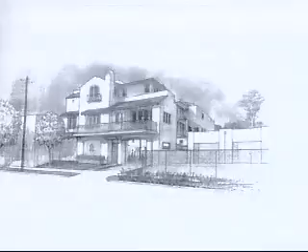The motion stated, item number 1: the mass, bulk, and scale of the project is still aggressive. Study ways to substantially reduce the project, including reducing the plate heights. The roof decks, elevator, and stair tower are exacerbating the overall height of the building. Restudy ways to reduce the overall height.

Number 3, show on the plans the 45-foot maximum height on the sections and elevations. Number 4, verify with building and safety the zero lot line requirements of the building code, which may significantly impact how the windows are addressed. Number 5, the board will continue to look forward to further refinement of the architectural styling and detailing. And one landscape comment: reducing the width of the curb cut to minimize hardscape along Anacapa Street.

Okay, Joe, go ahead. Okay, I'll just kind of jump around. On the height of the building, we lowered practically all the plate heights and the elevator height.

I'm getting the picture there. And I can go to the section. That's probably the best way to do it. This is one of them. Can you also outline what they were before and how much you reduced them by? We were close to 45 feet before.

Actually, I think we're above 45. Yeah, we're right, because we measured from... we didn't measure to the ground. I think that's what it was. You were above 45 before. Yeah, okay. And now that's 40 foot 2 at this end, and we're 40 foot 4 at that end.

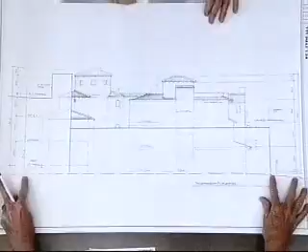All right, and you have a 10-foot plate height on the first floor. This is floor to floor? That's floor to floor, and 10 floor to floor second, and 9 floor to floor third? Right, with an 8-foot elevator tower?

Right. And did you have 2 eights before on these? Eights, and that's 40-foot 2. Right, and what were these numbers before, just so everybody has an idea?

I think they were taller before. I know these were 10, I think this was 9. Yeah, I think the first floor was something like 12 feet. Yeah, it was much taller. It would help to know that. Yeah, we did ask, we kind of thought there'd be an old set of plans.

Yeah, there will be. So move on, Joe, and then we'll have staff look for the old plans. Almost identical on the other, that's the back of the building, 40-foot 4, and that's the tallest portion of the building right there.

And then on the other side, it was the same. They were both the same. And then we go through the sections. You can really see where the numbers are. For instance, right here we had 39.2.

That part right there. I didn't see a 39.2 on your other elevation. At the top, I did. I didn't go to the grade. I think that was later. 10, 10, 9, and 8, then I had a 2, 8.

I think it's this, 40-foot floor to finished floor. Yeah, that's the back unit. 39.2 is the front unit. Oh, this is the only place I could do it, on the front unit, because I could clearly show exactly where that building was and exactly where this building was in relation to the grade.

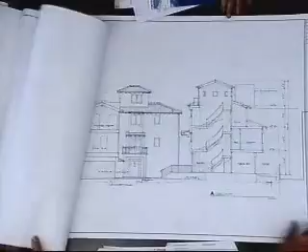The front elevation didn't, it was just a pretty drawing. Okay, let's keep moving. This tells where it is. In other words, it's 5 feet lower than it used to be. It lowered the whole thing 5 feet.

Did you show the maximum 45-foot height limit on your plans? I didn't show it on there, but I thought that would probably be make it all happen. Okay.

Go ahead, what were some of the other comments? One recommendation from the board was about the element in the A building laundry room. There was a suggestion that on the second floor we lose that, so we got rid of it. We connected the two buildings with a connection between this building and this building, a big laundry room and powder room. We took it out and put it on another level, which really opened this area.

This is all open all the way through, so both units are totally separated, with a lot more green space. You can't really tell this from the street, maybe from here, but whoever made the suggestion thought it was really closed up, and we agreed with them, so that's why we got rid of it.

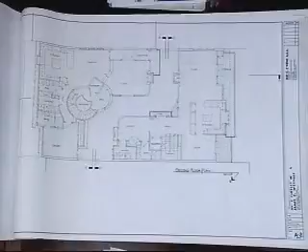Is that it, Joe? That's it. Do you want to, did you make any further refinements aside from lowering the plate height? We're still looking for the old plans, did you make, let's look at that.

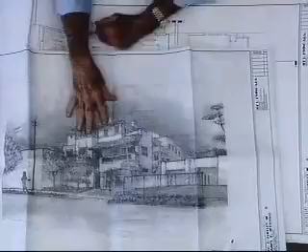Oh, this is really good. You see this right here? Since we lowered the building, we changed the pitch of this roof in the other direction so it looks more Spanish, because this was not very Spanish before. And they didn't like the design of that balcony, so we pushed everything back, especially here. There was a balcony showing on the plan that was too far forward, and we pushed it way back on the roof plan.

All right, let's take a look at the section. It doesn't have your plate to plate dimensions. That's at grade in the back of the building, this is the front of the building. The front elevation would show it. Okay, so this elevation, this is the back of the building here?

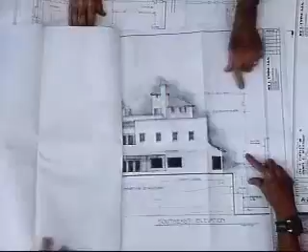You had 39 feet before, plus 7.6, I didn't add them up during this. 47, 46. Then I did the same thing here, so your plate added up. On the lowest level, the floor went from 11 to 10, so reduced by 1 foot on the lowest level.

On the middle level you reduced it by 1 foot, 10 feet here, 10 feet, 11, 9, that's 2 feet, 1 foot 9, and then here, that was a 9 foot.

So your total overall before was what? Did you even have that? Yeah, 40 feet, but that's not to here. Right, so you had, so I took this off.

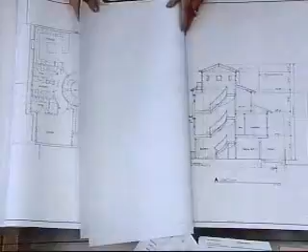This is looking southwest. Okay, where's the southwest elevation on the new plans? Here's the southeast, here's the back, and here's the southwest.

At this end we had 40 foot 2, then we have 40 feet looking southwest, but that's to the finished floor. I'm having a really hard time understanding this. Oh, that's a section. Yeah, this is a section here.

You have 6 more minutes, and then you get to walk away. I'm looking upside down here.

Is it just me? Does everybody else understand that reduction in the plate heights completely? Close enough, that they were somewhat reduced? Okay, let's move on, one or two more over, let's look at the individual elevations and how you have refined the architectural style and detailing.

This would be the southwest elevation. Actually, that's the front of the building. That's the northwest. Here we go, this is the northwest. And this is the old plan, and here's the new plan.

36, 41.6. And that's not even to the highest point, we took the highest point and dropped it down. And that is, without my scale... it's not a very long scale here. This is what you were supposed to do, you just measure from there to there and get it to you. Okay.

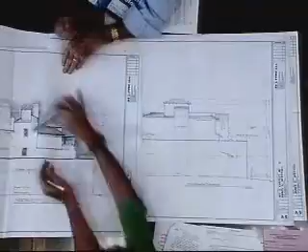It's 4 feet. So, over 36, 41.6, 45.6. And you took about 40, 2 foot, 5 feet, almost 5 feet off. All right, so we can put that away.

Did you verify with the Building and Safety Division the requirements for the zero lot line and how they might impact your windows? Yeah, we did that, and we have 3-hour windows that show us. It's not on this side, it is on the other side. You want to show us? Something in writing from them? No, just show us which windows. Those are it, just a couple on the dining room.

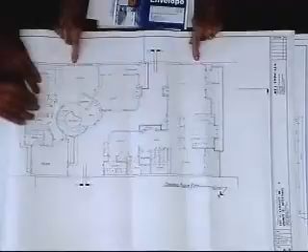Yeah, it's right on there. This is the second level here. Those 3 right there, and those 3 right there. Let's see them on the elevation and see what they look like. 3-hour fixed. Oh yeah, I do a lot of assisted living projects where you have to have that, and this is one of those cases. There's the windows right there. Those 3, and those 3, and that one.

These are set 5 feet back, so you don't have to have a rating. So you verified what the requirements were, and then you just know they have to be 3-hour rated. Okay, ever since 1954.

Did you reduce the curb cut to minimize the hardscape and increase the landscaping? Yes, we did. Do you want to show us? Considerably, still have enough room to get a car out. Oh, these are the old plans. No, it's in the one, those are the new plans. It's just like that, right here. Here's the curb, it was like almost from there to there, and I narrowed it down.

The item on the motion said to minimize hardscape. Yeah, here's the minimizing of the curb cut, that's part of it. Here's the existing sidewalk, we didn't change that. This is hardscape, this is planting, that's planting, and this is all, of course, planting.

So where did you maximize your landscaping opportunities? I had this right here was like this wide, all paved, and then I had an entry much closer. This is a little bit more space than I had here, and I had an entry right here, which increased that. So I considerably added a lot of green space. This is a pretty wide sidewalk, by the way. And they have trees on this green area. We almost talked about putting trees in here, but this is all yucca. Okay, right here. But we did add green space by reducing this driveway.

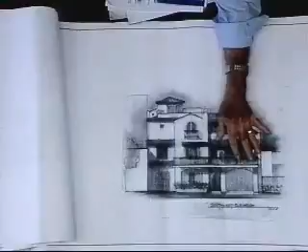So we had a solid handrail in front that went from here to there. We made it open, opened it up so it was all open all the way across. Made the building look a lot lower. And remember, this is a very narrow street, so you'll be looking up at the building all the time. So we had a roof that went like this. Where you see that roof, we made it a gable out of it and put the fireplace, which was already here, and reduced this in height.

In addition to that, this balcony right here is way beyond. It was a lot further, right next to this almost. So we pushed that way back, so you can't see this, can't see that, can't see that roof. You can't see this roof when you're in the street, unless you get on top of the building across the way, which is a warehouse.

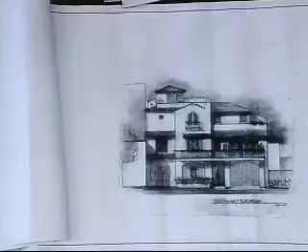Okay, here's the elevations. Where's the existing tree? Here's the building next door to us beyond, brand new. In fact, I think it's still under construction. Do you want to go through all 4 elevations really quickly? Sure, yeah, good.

Here's the building next door. You won't be able to see that part of the building at all beyond that. And then there's a roof deck over here too on that building. And on the back end...

Northwest elevation. Oh yeah, okay. On the back end, here's the building right next door, zero lot line. Building next door, zero lot line. That's the Santa Barbara Winery warehouse, storage warehouse, or one of them.

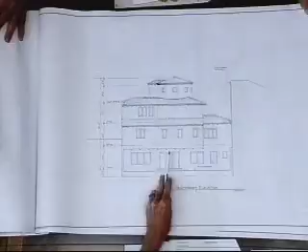Also, I want to add that we're extremely green on this project. There's a new block we're going to be using that's totally green on the exterior walls, which is also a 4-hour rated wall, and we only need 3.

Can you explain? I remember before one of the comments was that the property owner next door was concerned about losing his sun. Here's the wall line, it goes back. Here's the 3 feet right there.

Can you explain how you changed this elevation that would allow more light to come in? It was similar, but everything was taller. I lowered this, we lowered that, pushed that back, pushed this way back a lot more. It was the same face, but we had less of an opening here.

Because this is on the property line. That wall right here is on the property line.

But you pushed that back, you're saying, to have an area where you can see the ocean from here, and you can see the ocean from this building, even from these living room windows.

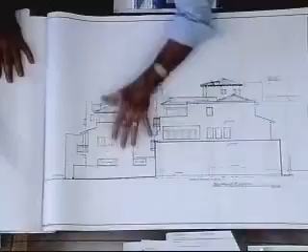And we made this deck smaller here off the master bedroom, trying to open this up so we can get some sunlight. Even doing this for car parking right here, and we opened it up here and here, to get some breeze and more sunlight, facing the south sun.

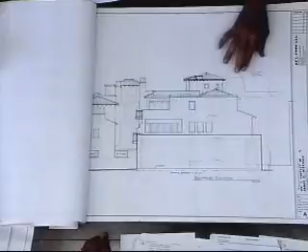This large building next door that has been built - I was out of country and didn't scrutinize that to its full extent, and didn't realize how much impact it did have on me, which is why I'm now concerned about what's going on here. These guys did reduce the height of this greatly, which is a great thing to do.

I have two areas of concern I'd like to ask. One is that there is an area of, is it 1.7 or something, from this property line to my property line? Do you know how big that void is behind the property? No, not really. Do you show your property line as 100 feet or 110 feet, or can you read that number there? 110 or 11. But what's the question?

My question is that there's a void here. I would like to know where this property line is on their property, in terms of how close it will ultimately be to my built structure. My built structure is a 10-foot setback from the property line. There's actually a void, there was a 5-foot something void in there that they have captured some of. I'm questioning what's remaining, and if they will then honor their 10-foot setback from their property line.

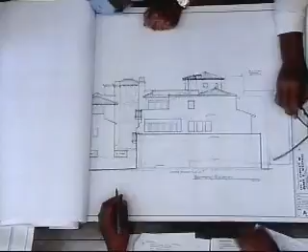May I answer that? Sure. It's 10 feet from here to the property line, it's 10 feet from here to the building - that's the building next door. Okay, that's the warehouse, the Santa Barbara warehouse.

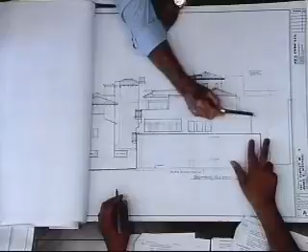You're doing a 3-foot cantilever on the second floor, 7 feet from the property line. We could have gone 4, but we said no, we'll go 3.

In truth, there was a piece of property between these properties that had not been claimed. When your property changed hands, the seller captured 3.5 feet additional property from that no man's land, which left an additional 1.75 feet of property between what is now yours and what is now mine. Did you know that? Let's not worry about that.

We're here about this, so my question is: to what property line are they building? I don't think they have 110 feet of property line. Okay, we'll ask the question and look into that.

Additionally, I'd like to know if it's appropriate to request a sun study to see exactly how this is going to affect my property. Okay, we'll look into that. Anything else? That's it. Okay, great. Thank you. Thanks so much.

Are there any other speakers? If not, we have a letter of opposition from Ms. Paula Westbury. Are there any other staff comments? Okay, one quick question for you folks before we go to the board members.

Do you have a survey of the property? Yes. Is it part of the drawings submitted, or a previous submittal? It may be with the other original set. I don't know if I brought it, or if it's on the truck, but we'll look into that, because that's how we'll answer the question of whether you're at 110 feet or 107.

Now, questions from board members? Yes, Keith. You weren't fast enough on the mic. I'm sorry. Explain to me again how you're getting windows right on the property line.

I'm looking at table 704 from the current building code, and it indicates maximum area of exterior wall openings, and for 0 to 3 feet from the property line, it's indicated as not permitted even when protected.

So I'm wondering about these. They're not openings—it's a solid, 3-hour rated assembly. It's not a window, it's just a faux window, a piece of 3-hour rated glass. It's like a wall; the whole thing is 3-hour rated, not just the glass. We've got to maintain a 3-hour rating.

Is it operable? No, it's fixed, so it's not considered an opening. The windows are not operable—there's some that they're calling assemblies. They're not actual windows, but they're rated assemblies that act as a wall. They just happen to be clear.

So it's not considered an opening then. If it's not considered a 4-hour wall, it's a 3-hour rated assembly, looked at as a wall assembly that's actually clear. The code reads: if it's a 3-hour wall, you can have fixed glass with a special frame. If it's a 4-hour wall, you can't have anything but a masonry wall that's 4-hour rated. And this is 3-hour.

No other questions? Carol, would you mind reading the motion, please? The previous motion had a landscape item: reduce the width of the curb cut to minimize hardscape along Anacapa Street and maximize the landscaping opportunities. And then there were 5 items for the architecture.

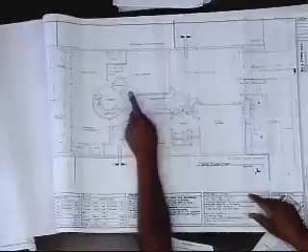this last time, and I'm looking at the two-car garage that you pull straight into. I imagine you've looked at this with transportation, but is it feasible to actually do a three-point turn out of that garage and exit the structure? We have 25-foot setbacks in both directions.

And then also on this first floor plan, the entry archway off of the sidewalk, you're showing doors, a double door there. Is there a door there? Because I think in the elevation it doesn't show. Iron gates, wrought iron gate. Okay.

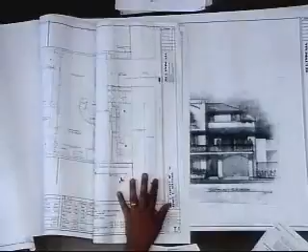I imagine it's not a real view. No view, and you don't want to let any light into the interior. Well, we've got openings on other walls, doors or windows. Right, okay. Okay, those are my questions.

Thank you. Pass them on? Clay? Mr. Chair, I have a question.

Chris brought up a question about the wrought iron gates for the pedestrian entrance. Are you intending to put a gate or some kind of enclosure at the vehicular entrance as well? We'd like to. But you're not proposing it at this time? Is it necessary to propose it now?

I figured it was one of the things that, as we went on, we'd want to show it in more detail. We want to be reviewing that if you're going to do that. I think, in today's atmosphere, we'd probably want a gate with machine gun turrets. I was going to put it right there.

Okay, so if we just make a note in the motion to come back with additional information if a gate is being proposed, so it's part of this design and part of the entire thought process. Okay, so we'll make that as a note, and you can come back saying there is one or there isn't one, and we'll look at it from that point.

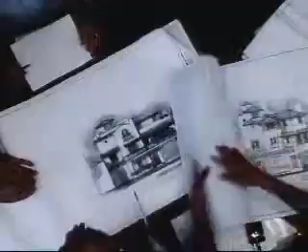In this elevation, as Keith mentioned, the balcony over the kitchen area is narrow and not very usable, and is adding some linearity to this project. And I think the previous plan at least had some character with the entry coming in here with this little roof element, where it's completely hidden in the new elevation.

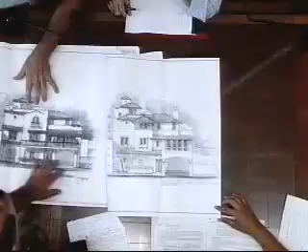I'm having some issues. I think this was a little bit better, but I'm really having some issues with how the street facade is on this, and how there's no community benefit to this. As you're walking by, it's really going to be kind of a hollow-looking building, and it has such wonderful internal paseos, but you can't really appreciate them.

So what we're doing is giving the residents of the city a side view of a big building and a front view of a big building, and nothing at the street elevation. I think the public benefit of this building is really low, and I'd like to see some articulation, some street friendliness, something that's going to give a benefit to the city.

I also think the overall massing is still pretty large, and I would be in favor of a reduction of the overall massing, because we're using so much space on that courtyard - which I do appreciate courtyards, there's something romantic about being able to walk into a courtyard. But this isn't a public paseo, this is a private one. Well, anyways, that's what you're seeing when you look through.

This wall is blocked off, so you don't really see through here, and this wall here is blocked off, so you don't really see light through here. So I really think the public benefit is minimized. I have a big opening across here. The wrought iron opening, yeah. I saw - there's a parking lot right there.

Anyways, I would like to see - I was looking at it for the site plan.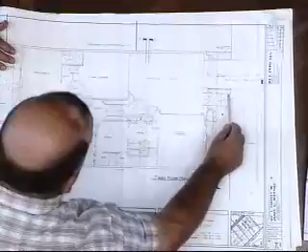And so what we have is this big courtyard, but it's blocked off by these walls right here. So all of this entryway, this front yard, is not really a public benefit. I'd like to see something that's going to make the public happier. Some of this walkway here, the hardscape, maybe that can be addressed in a different way. Even though these gates are opening, you'll be able to see all the way through to this back courtyard from right there. You're looking at all of this right here. Well, it's also very cavernous.

I just don't think it is. And it's open there too. Lights coming down through here, lights coming in here. There's cars parked solid right there. Yeah. Okay, okay. Oh, you want? I'm sorry.

I'll jump in with a couple of comments. I appreciate reducing the building, it's working. It's interesting when we look at the articulation here versus the other drawings. I think this was really busy, and now we've got really simple, so now we can start crafting in a couple more details when we finally refine it.

When we get to the point of looking at some details, like your cantilever on the back for the 3-foot, I'm concerned that's just going to be a 6x post—heck, not even a 4x, we need like a 6x, 12x. Visually, the massing just looks like it's going to support it, so the detailing is something we'll need to look at when you get to that point.

This is a good drawing. One thing I looked at here, it sounds minor, but if we're in a zero lot line condition, we can't be draining water this way unless we deal with a concealed gutter. That's just something you need to address, just like your windows.

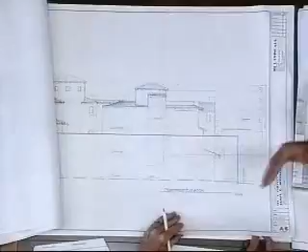So now we're looking at 44-ish. It's important that the drawings that come back show what your original site grade is and show 45 feet from there. Then we'll make a determination on whether the height of the building is appropriate, as well as the use and activity of the upper deck.

And that's really all. Personally, I question the functionality of the courtyard in between, and I'm having a hard time visualizing it in my mind. I can see the two masses, but then when I think that they're 8 or 11 feet apart and it's 3 stories up, I just think it's always going to be in shade. I don't have a firm enough image in my mind of whether it's wrong or right.

I'm just asking you to look at that and think about it as designers, go around town and look at alleyways. What's the separation between these two buildings now that you have 2 individual buildings? Is it 8, 10, 11 feet, or more like 15? In some places we're more. And your tightest is 7 feet, so you have to realize that, and then you go up vertical 2, 3 stories. Yeah, but it steps back a lot too. I'm having a hard time with that. Okay.

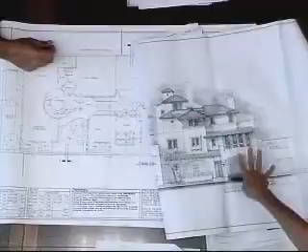And the way the building stepped back with a little more curve and interest, to me, this almost looked less massive than what you're proposing this time. I think every item on this motion is still sort of a question in my mind. I don't feel like all of these items have been satisfied enough to really move it along. I think it's going in the right direction, but there still has to be a lot of going back to the motion and really looking at each item. But it is moving in the right direction. Well, that's something, but not quite there to satisfy my concern with the mass, bulk and scale.

All right, thanks Carol. Chris?

Yeah, I'm going to agree with Carol and Clay on just the overall mass. I think we could still work towards reducing that. It's a real big project on a small lot, surrounded by 1 and 1.5 story buildings, so I think it's really going to pop out there. The one main area I'm concerned with is this southeast corner, and how it's adjacent to an open parking lot, and how quickly the building rises out of that corner. I think it's going to be very imposing.

Right, exactly. And I'd like to see some way of softening that corner a little bit more than a tiny little planter in the very front. Yeah, that's my recommendation there.

Well, no, if I could just make a comment. I mean, this is just for light coming into these units. If we close these up and have 5 foot on either side, and these buildings go up 3 stories, which you know that they can, you brought it up at the last meeting, then where are we?

Yeah, you're gonna- at least we're able to decorate in here, so if I'm looking out this window here, it's not like I'm looking at a block building. But you're saying that, let me just finish my comments.

You're saying that this alley is to bring light in, but you've only got 2 windows going out to it. This one's very small, so I'm not really understanding that. So let me just finish my comments. So I agree with the rest of the board on that one.

I don't see a substantial reduction in the mass, bulk, and scale yet, unfortunately. But I do appreciate the reduction in the height.

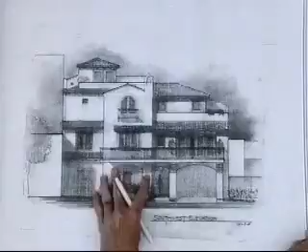I don't know what Keith and Gary said about the front balcony, but I had my own take on it. I don't mind it, and I appreciate the front balcony, but I think it's too lineal and doesn't look like it has enough support. It looks very much like a 70s Spanish-style balcony, not a traditional take. I agree with Clay that the detailing is going to be important, and picking up on some vernacular, traditional Spanish detailing, and possibly breaking up this long stretch of balcony would help this front elevation.

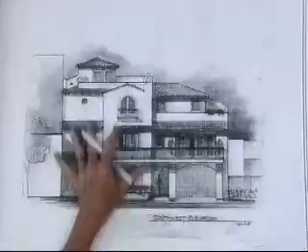But I think the front elevation is not bad. I think it's getting there. But again, more charm-giving elements would be appreciated.

What you can't see on this is a little in front of that—that steps back, this steps back—so it's way beyond. I understand all that. So I was talking about the balcony, and the fact that you're going in the right direction, but I don't think it's quite there yet with the detailing.

It's premature for me to start talking about small little details, but since they're here, things like a little thin wing wall that is doing something, I don't know what exactly.

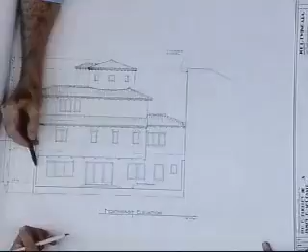That's the adjacent wall to the next door. Is it on your property? Yeah, it's actually—not right here? Yeah, here, the fence will probably be back on this side, but there's a building back there.

Little details like the wall—because of the adjacent building—things like just a box to allow light into this interior covered patio space. To resolve that with just a box is a very contemporary way of doing this detail, but not so much traditional Spanish vernacular.

So those are my comments. So with that, would anybody like to entertain a motion for this project?

Just briefly, because we're 10 minutes behind already—it's the compatibility analysis questions that we all have to ask ourselves every time we approve a project. One is compliance with the city charter and general consistency with design guidelines. Two is compatibility with architectural character of the city and the neighborhood. Three, appropriate size, mass, bulk, scale, and height. Four, sensitivity to adjacent landmarks and historic structures, or historic resources. Five is public views of the oceans and mountains, and appropriate amount of open space and landscaping.

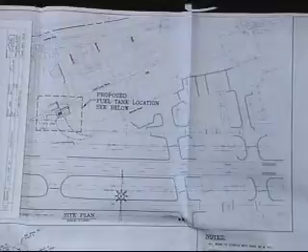Right now it's located at - we've entered into a lease agreement on the former Forestry Department ramp with the airport and the city of Santa Barbara to be located just there. The project is to remove approximately 440 square feet of existing concrete and over-excavate. Specifications are on the front page. We'll recompact and reinstall 440 square feet of concrete with appropriate footings to support the fuel tank. Kind of a small project, not a condominium, but equally as important.

Can you show us, direct us to the elevations of the fuel tank? Should be on page 2 of the plans. And it's a section.

So what I'm looking for is how high it is off the ground. We have a new drawing that we didn't... it's 11 feet high. The top of this is - because this is 7, it's a protective bollard. So wouldn't this be about maybe 8 to 10?

That's correct. The top of the tank is approximately 10 feet, and we have vapor spouts that stick up about 10 feet 11 inches. Overall dimension.

No, I didn't see any photos. Sorry, that's all right. That would be good - we should have that. That's what it looks like, finished.

So it's a tank and the bollards. Correct. And then can you show us - let's look at some other photos. Can you explain some of the photos about where it's going, so we can see how visible it is? Absolutely.

From - what's all this stuff? This one, photos, there you go. Okay, so this is the former Forestry Department ramp - what we're looking at is all this hardscape area. This is an existing hangar, I don't know who holds the lease to it.

Let's look at this photo. This photo is looking east, looking this way. This building is that hangar. And this is looking north, which would be this direction. When complete, aircraft will transition left to right.

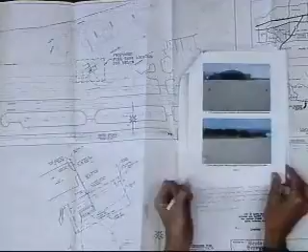Does this photograph show where the tank is going? It's depicted by the orange markers that are out here, placed on the concrete. Okay, that helps, they're like the story poles. Not quite, but in plan view.

And here they are again, looking west. Sure, we're trying to give you all different views and angles. The yellow marker shows where the utility pedestal will be placed, for phone and power. That's where we'll come in, and that's where we will tie into. Is that right here? That's correct.

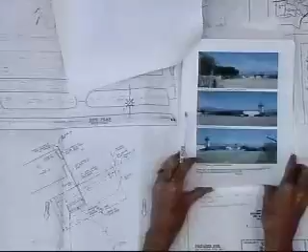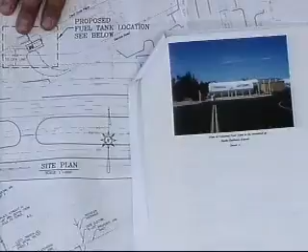Okay, so I'll put that one on there. Is that your presentation? It is, unless you need some more information. I will add that these bollards depicted in the picture are shorter than what we will place here. We wanted a little bit of extra protection. You want 7 feet? Correct. So it's more like that size? That's correct.

Let's do public comment. Just one letter, from Ms. Paula Westbury, in opposition.

Questions from the board? Yes, Keith. Are there any safety or code restrictions as far as the color the tank's painted? For instance, should it be yellow or red, et cetera? None that I've ever heard of. Typically the tank is just colored white for obvious reasons, so it doesn't reflect heat, and it has a real thick epoxy coating on the outside to protect it from rust, et cetera. But as far as it being marked red, yellow, et cetera, none that I'm aware of.

More questions? Gary? Is there any proposal for landscaping or fence screening on the chain link fence in this area, right here to the parking lot? You have basically a 150-foot path that you're placing this in. Madam Chair, if I may, Andrew Ramonda, planner at the airport. We're not allowed to screen the chain link fence at the airport operations area. That's the secure area for the airfield. It's a TSA requirement that that be open so that law enforcement can see through.

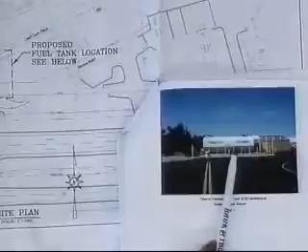Painting this is a better solution than fencing it. Normally I probably wouldn't say that, but because of the simplicity of it just being a tank, if you put a fence around it, it's still going to look like a block of something anyway. So I don't have an issue per se with it being a tank. That's kind of what I'm hearing from everybody else except Gary, which doesn't take away the importance of his comment, but that's my individual take on it. So I don't have an issue except that I think the color should be a little less glaring white. I'll let you, with all these comments that you've gotten, take that and go with it.

One of the things he and I did talk about was making sure the aesthetics fit on the airport. We've been around, we know what's there and what it looks like. And one of the things we talked about was making this fit into Santa Barbara's scheme. Okay. Yeah, go ahead, Carol.

Motion for preliminary approval. We can't, it's comments only. But Michelle, is the environmental done? Can we make a motion, or is it comments only? Okay, positive comments to return back to consent.

With the following comments: present alternative colors, and I just want to ask the board, for the top portion, are we all okay with the gray bottom? Okay, for the top portion. That's the only comment I heard that was a consensus.

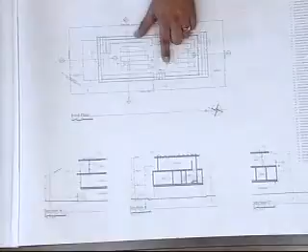Up on the roof, we eliminated our tall roof access hatch, we'll go to a simpler low hatch there, though I haven't figured that out yet. And we reduced the height of the trash vents as the board requested last time.

Going to the elevations, the two elevations of concern last time were the east elevation and the elevation facing the street. Starting with this elevation, the plaster used to come up like so, and we've reduced the amount of plaster, which was one of your comments, and you also wanted to reduce the amount of glass. We studied bringing as much glass on here as we could, but it got a little wimpy, and I think this composition works really nicely. We also extended this piece.

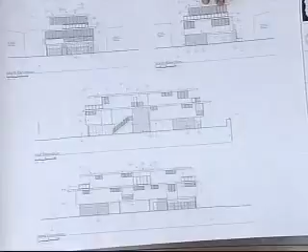Got some 3D shots to help you see what we're doing here. We pulled this overhang out to get a good shadow line separation, and maybe do a little trellis penetration like we're doing elsewhere to give some interest and shadow line interest to that wall.

Down here we had shown 8x8 block before. Previously we were using a ledger stone, very horizontal, and we've gone back to that, which was one of the things we heard last time as well. It's a dry-stack ledger stone, about 3 inches, that just comes straight across.

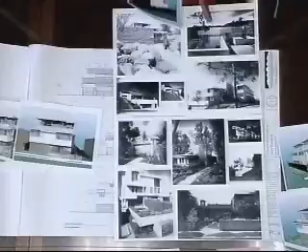Talking about entrances in this style of architecture, Mark put together this little exhibit for everybody. It's important that in this style of architecture, the entrances are not celebrated whatsoever, they're hidden, they're subtle, there are just clues to the entrances. You can't easily find the front door on these. This is the one up on Pedregosa that gives you a good clue about the style. The path to the building gives you a hint at the entrance, and it's not obvious when you're on the street that this is the entrance to the building.

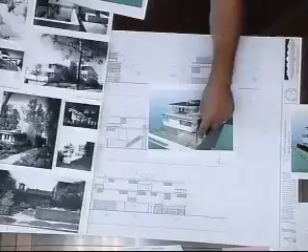We added a little low wall here to give some identity to that area, but we'll keep it subtle, again pulling this stair up front. We pulled this fence back here to allow a little more visibility in this area. This is the subtle entrance up the stairs, where the real entrance to the building is up on the second floor, in that patio area.

These are shots of the side of the building. We made this pop-out a little smaller, brought it forward a little, and reduced the amount of glass on this elevation, which was one of the refinement comments we heard last time. We're going to pull this stair back, and this screen wall—we're not calling it a vegetated wall anymore, it'll just be a screen wall, decorative—is now flush with the other walls.

These are other shots of the model, if anyone wants to see it coming around the back. That didn't seem to be much of an issue last time.

So, to summarize quickly, we've refined the architecture as was asked of us. Our second and third floor encroachments have been eliminated. We've reduced the impacts of that stair on the roof—everything has been brought down. We've refined the architecture with less glass, less plaster at the street, with the ledger stone.

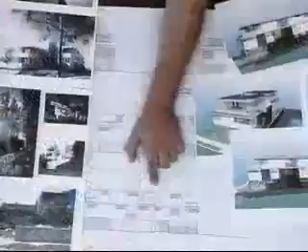Did you address the trash bins? It wasn't the bins, it was the vents on the roof—it wasn't the bins themselves. Oh, okay, there's some vents here. I didn't catch that on the notes. Yeah, it should have been the vents, not trash bins. These are a lot lower than last time.

Thank you. Thanks, Pete.

Okay, we're in public comment. We have two speakers before we get to that—can I make just one comment about Pete's presentation?

Yes. Okay, I just wanted to say, because Pete did ask me to do the study on the entries, and that has been something of a concern. I appreciate the board bringing it up. I don't want it to be heard that entries aren't important to a building—obviously we want to get into the building—but in this style of architecture, the composition of the building is what's important, and the path to the entry is always clearly defined. Even in a building like this, where the building itself takes the pivotal position, the path to the entry is always clear. Looking back to the classics and to recent ones in Santa Barbara, we've enhanced the path to our building by bringing the staircase forward, adding a low wall, and making a nice place for the numbers. So the path is important—when you see the composition of the building as a vision and find the path, you follow it and it ends up at the front door. That's how all the modernists set up their buildings. The door is not a Grecian Parthenon, a sacred place to cross under—it is the place to find. So I think we get that. Okay, thank you. No, thank you.

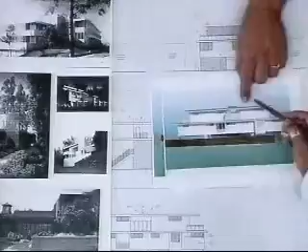I wanted to understand something that I was seeing here. These five dark elements, what are they? Those are the condensers. What are they? Those are the condensers? Yeah. And these are the vents beyond? Correct. And that's the top of the elevator shaft. Okay, this is the top here. Right. You can see this here. And this element is just a— it's a privacy guardrail, screen. Yeah, for lack of a better term. Okay, I think those were mine.

All right, Carol, questions? Chris? Two minor questions. The trash staging area out at the street, is that a different material, or is it just indicated as trash staging? That's a requirement from our DART review. And then this spider leg that we have in the front, what's the thickness of that? Six inches, four to six inches. Maybe five by five. Okay, that's my question.

All right, comments? Keith? Well, I think you've resolved the issues up on the roof as far as the projections there, and I think the modifications to the street elevation and reduction of the plaster, extending that horizontal line to break that up, are all positive moves. So I think you've pretty much responded well to all the comments we had last time. That's it. Gary?

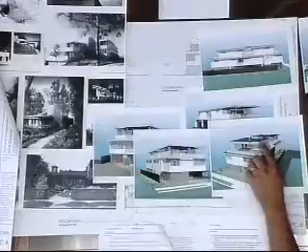Paul? Just a couple of quick things. What Keith said applies. One change that I noticed is you created a shadow line here, and it's not shown here. I think it would be beneficial to have that shadow line because it wraps around and would connect to here. So I think you're still playing with it, and it makes sense. Second, when you go to the next step, if this is going to be your green roof, you might as well color it green, because you look at this going, what's going on the roof, but then you start understanding that it's going to be green and there'll be a line of green.

So that's just a minor comment. And then the last thing having to do about the setback, whether it's in the side yard or in the front - the way I understand it, you're putting a significant rear yard setback due to the creek, and that was negotiated with the planning department and exchanged. You're doing these encroachments in these other two areas, so that's for them to handle as a planning issue. Architecturally, I understand it. I thank you for moving your stairs like you did and changing the interior, and thank you. Clay?

Madam Chair. I'm struggling with this project because, one, I really like it, and I like that somebody's proposing this style of architecture. I'll disagree with Gary - I don't think it's inappropriate. There may be other styles that somebody might say is more appropriate, but I don't necessarily think that this is inappropriate. Having lived in that neighborhood, there's a lot of stuff going on. For me personally, there are little refinements I could nitpick, but I just don't want to. I think we can begin to move this forward. I'd like to see some refinement to certain areas, but if we're talking about just pushing this on to go to PC and the next step, then I'm much more comfortable with where we're at today than previously.

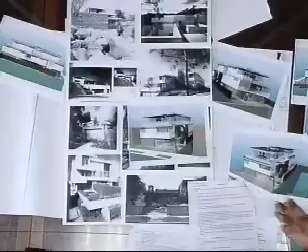Our comments from the last motion - I still am not comfortable with how the building looks from the street. This isn't an office building, it's a residential building, and I don't think in that regard it's compatible. If you would present something with this feeling, where the garage opening didn't dominate the space, I would feel differently. But I understand this is your program. I'm still thinking it's unfortunate, and hearing everybody else's comments, I do realize I'm in the minority. But I just have to say what I see here.

Where is the comment here, Madam Chair, referring to the front facade? I remember - okay, create a more pedestrian-friendly street frontage. That's the only comment here that I don't think you accomplished to my satisfaction. So, there it is.

Carol, I'm not trying to argue with you, but there are a couple examples on this board where the garage and vehicular circulation is kind of front row center. Strive for the best examples, not sink to the mediocre examples. I'm just trying to - I thought it might be confusing to the applicant that you're saying that in all these examples, okay.

All right, I don't have anything further to add. I agree that - oh, Chris, sorry. I wouldn't mind Chris adding something.

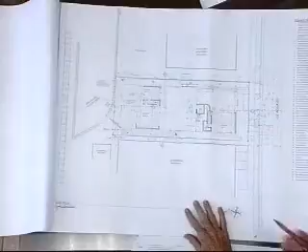And you guys asked us to reduce the width to 14. Yeah, this right here is our backout. Right, we're okay, just making sure. So the line I'm looking at is this one right here that kind of comes to a point and then goes straight back. I'd encourage, I don't know if you want to get into any kind of curvature, but maybe a looser S-curve of some sort, so that it comes in like that, so the planting and the way it intermingles could be a little more balanced, I think. That's about all, pretty minor.

Yeah, I do have one comment, although I agree with Keith in what I'm hearing from the majority of the board, that it's time for this project to move forward. The comment I'll make is with regards to that image board that Mark put together, really helps. Let me see that again. And what I do agree with Carol about is that all of these images have something about them that makes the project approachable. It's not that I don't think it's a good project, it's that I think this experience when you're walking up, and then there is this very large... let me see the front elevation perspective again.

There's that large void that you have to walk under. I don't think it's ideal, and I think that's maybe where this project is not hitting the mark that I see in all these other ones -- that you're having to walk under this large mass, and it's kind of cold. It's not going to be light, it's going to be shaded, and it's going to be probably breezy.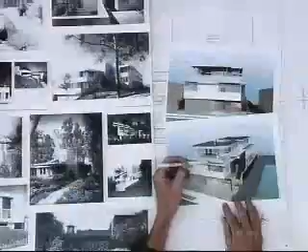You're talking about this mass here? This walking, when you walk -- but you're not underneath here, you're walking like that. And Carol thinks people are going to walk like that. Well, okay, they're walking along here, and they're walking under a structure. So that's where I think in all these others I see people not walking under a heavy two-story structure, and that is, to me, maybe the only downfall of this project -- the lack of bringing it down to a human scale. I think maybe that's what Carol was touching on in her pedestrian experience, and I have to agree with that.

But I don't necessarily think that in your case the vehicular circulation or the visibility of the doors is a negative factor. In fact, you do see it, but I appreciate that it's off to the side on your project as opposed to being front row and center. That I don't think is the biggest drawback. I think it's having to walk underneath this mass that makes it not feel psychologically comfortable as you walk up to the building. So that being said, would anybody like to make a motion?

All right, then I guess this would be a motion. Motion for what, Madam Chair? Indefinite continuance to the Planning Commission, with the following comment: that the board feels that the applicant has sufficiently addressed the previous concerns.

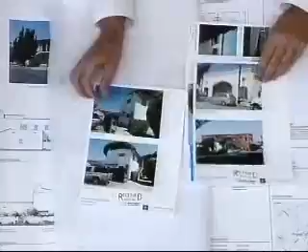The building's a corner building on the corner of Milpas and Reddick Avenues. There's an existing house at the rear of the property. This is a corner location, with mature landscaping that limits the view of some of the background elements of the building. The principal portion of the building that's visible from the public way is the corner. These are shots from the rear of the building.

Here's a facade that illustrates some of the proportions that, upon first glance, the instinct was that they didn't represent the kind of approach we would start from scratch to achieve. So with that said, we took the existing character of the building and sought to make it an opportunity.

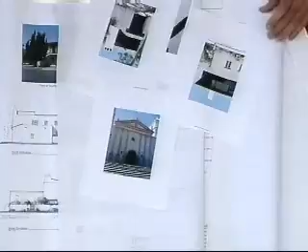Part of what we like about the mission is that the orders, the Ionic orders, are misinterpreted. They're examples of something done in a vernacular approach that's untrained, but that gives it a particular intrinsic character that's appealing. As we looked at that approach and how it was applied in other buildings around town, on Canon Perdido Street there's a couple blocks where Frank Robinson did an adobe with this more raw character, and a residential unit where again we see proportions that don't come from textbook examples but are combined in a way that has an element of authenticity to it.

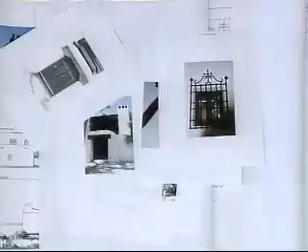It's an architectural approach similar to what happens with outsider art, where the untrained eye creates things that have interest. This is an example of a grill that's at the courthouse, and the courthouse is another example where vernacular elements taken from rural Spain came together much more in civic or heroic examples to create a revivalist style.

This building doesn't carry quite the importance of something like that, but it defined an approach to dealing with the changes to the building and gave us a point of departure for the aesthetic character.

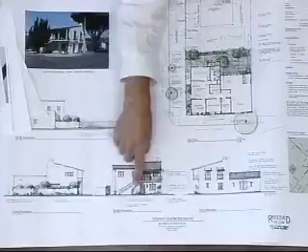So what we did was replace existing windows along Milpas Street, developed ironwork and a screen element. We kept the overhanging balcony above with the plaster cover to the outriggers, and added awnings. As you turn the corner, we have a custom designed light fixture, an address and signage located in this position, a simple door with a rather organic arch, and gates, hinges, downspouts and water collectors that all carry the more simplistic approach to the architectural character.

The elements that appeared on this grill, instead of following a dimensional bar stock that was hammered to scrolls that adhered to particular proportions, this is flat ironwork that's twisted as it goes around the corner to create the turns in it. This was used as we developed the character-giving additions to the building.

This is the awning bracket here. This is a simple grill made of pavers set on edge with a tile in the middle.

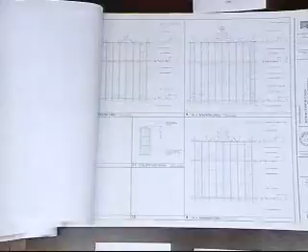As you get to the grills, which are really the principal changes along the pedestrian zone of Milpas Street, you see that we've incorporated variations of the courthouse example. This one has a cup that's round with a little bouquet on it. This one has a little crown, and this one just has a spade.

And then here's a wrought iron fixture where it's faceted. It has a couple layers of ironwork that are cut simply, and will have a very hand-manufactured character to it. So that's in principle what the design approach is.

The interior of the building gets some changes to accommodate the change of use to an office use, and we're grandfathered in for no additional parking and so forth. The colors, again, follow a very simplistic expression of things that we've seen a lot of.

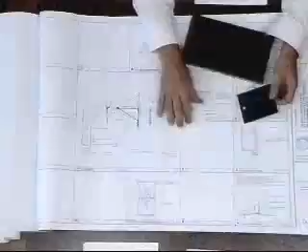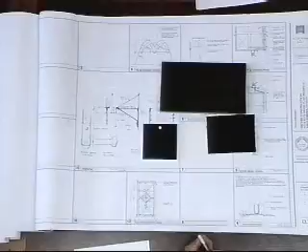There's a white plaster that matches the existing building. This is wrought iron and windows. There are existing metal windows. The awning color follows suit with a very neutral earth tone, and then picking up on the colors that we saw on Canon Perdido, we chose to use a darker stain to offset the wood from the plaster and metal.

And there's new landscaping? That's correct. The landscape sheet. Trying to keep things very simplistic with the landscape approach.

There are a couple of courtyards in the back that receive special treatment, but along the public way, there's just this inset from the sidewalk that gets a couple of drought-tolerant or indigenous type plantings, and that's in principle all you'll see from the public way.

All right, do we have any public comment on this, Michelle? One letter of opposition from Ms. Paula Westbury. All right, thank you.

Questions from the board? I just have a question about potential encroachment issues with the ironwork along the Milpas Street sidewalk, because it appears the building's right on the property line. Are there any issues with how far that's projecting out?

We're holding the ironwork close to the building so that it doesn't really move further into the public way than the windowsills and things. We're holding them real tight to the plaster. How far, the building is on the property line? Yeah, and how far does the wrought iron project beyond? No, it's on the detail there.

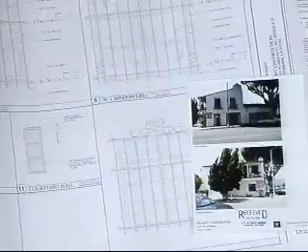That's correct, yes, and this balcony is recessed. So what Keith's talking about is the wrought iron that's projecting 4 inches out on the lower portion. But you might have an issue with that. We'll have to check that, because the property that is the sidewalk now was conveyed to the city for public use, and so there's some discrepancy as to what rights we may have to project these or not.

Okay, that'll probably be a part of the motion, but just something to be aware of. More questions?

I did have a question. The entryway that is facing State Street, or the entryways that are facing State Street? You mean Milpas? Sorry, Milpas Street, thanks. Milpas Street, they're going to be completely eliminated on both A and B buildings?

That's correct. This is an office use, and so the idea that the doors are appropriate to Milpas Street is less so if it were retail. So we chose to bring the door around the corner to put it under the cover of the projecting balcony. And as you can see from the site photos, the principal exposure to the building is from the corner.

All right, questions? Clay? No questions? Okay, comments? Go ahead.

I have a real issue from an urban design standpoint: this design takes storefronts that provide pedestrian interest along Milpas and literally turns its back on the street, boarding those up. I question the compatibility of that with our urban design guidelines. I realize it's an office use, but I still think it needs a more pedestrian oriented experience right on Milpas Street. I have a real issue with the fundamental design layout. That's it.

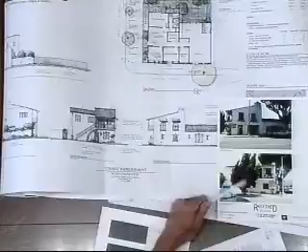In thinking about the change of use, I could see that they want a little more security from Milpas, but I also see there might be architectural advantages to making really big windows that Milpas could peek in, so there's a relationship going on — it's not so much blocking and separating from Milpas. I do see there might be some movement where the two of you could come up with a solution.

I just want to make one small landscape comment: there are two pepper trees proposed on the property, and what I'd like to see is an alternative choice, because peppers are so messy, and I don't think this is going to be appropriate or a good choice. Since there are so many other things that could be put in those places, I'd like your landscape architect to at least consider a different choice than the pepper tree.

Chris? Yeah, just to continue with Carol's comment, I am with her on the peppers. I think they're also planted right on the property line for the most part, if I'm not mistaken. So they will encroach on the neighbor, and feasibly you could cut half the tree off and they would be able to do so legally. Beyond that, I don't have any additional comments other than I agree with the board as far as the building sort of turning its back on Milpas.

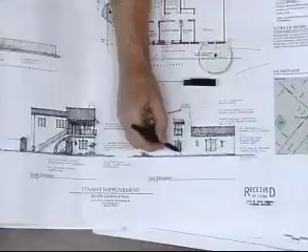Let this just go into a door here, because this window here is, in essence, similar to the other one. So if we ended up with a door here, you'd still have an element that addresses the Milpas Street frontage.

So let me ask the board this question. Does the board feel that would be a sufficient solution to providing adequate pedestrian friendliness to the Milpas elevation? Just three feet? I think we need to look at the urban design guidelines about creating pedestrian-friendly facades.

I think it still... but this building is not a retail building, it's an office, so we're putting doors into a workspace. You don't have to have doors, I'm saying its fenestration is turning its back to the street and the public. I think you're taking away from the streetscape. It doesn't need to be retail, but it's still a heavily trafficked sidewalk.

Okay, so I think you're just going to have to come back one more time, even though you're so close. It's just that one issue the board's having a hard time giving you. That would have been my solution, but it doesn't sound like that's going to be enough for the rest of the board. So would anybody like to make a motion?

I'll try, I'll make a motion. Go ahead, Carol. Okay, could this come back on consent? I don't know, how does the rest of the board feel about this coming back on consent? Who's on consent right now? I would be, Clay. So...